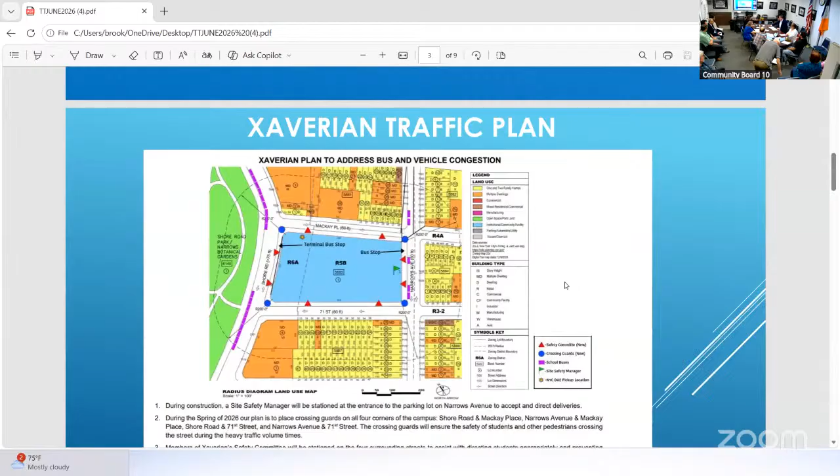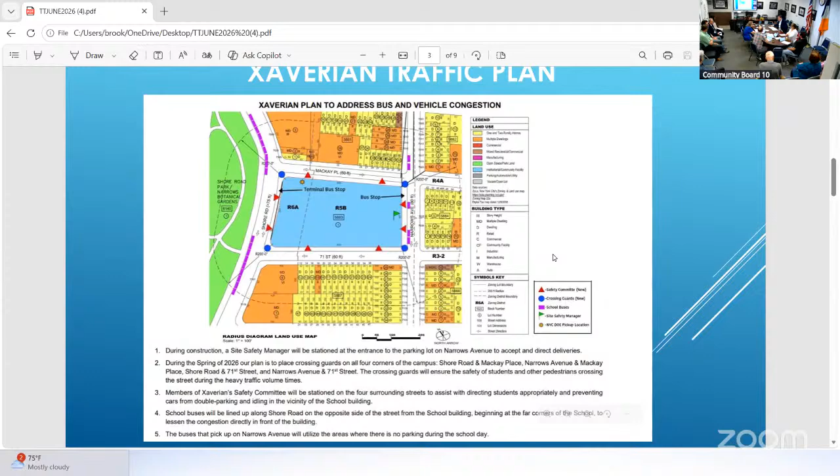The reason we're here today is to fulfill a promise we made to the community board, the traffic committee, about 6 months ago, when we sought endorsement from the zoning committee for a Board of Standards and Appeals approval for a variance to construct an expansion on an existing wing of our building. We reported to the committee in April that we were still implementing our plan. The plan we'll share with you shortly was also requested not only by the community board and the traffic committee, but also by the New York City Board of Standards and Appeals and their commissioners. We're happy we've been able to fulfill that request for everyone. Our plan is just about fully implemented, and it aligned properly with the start of our construction project, which was on May 15th.

I know the plan is being displayed now. I'll just walk through it in its general state. The objectives were to provide safety not only for students but local pedestrians and street crossings during both our arrival and dismissal times, which can be a little hectic for a school, as well as to provide the best means of operational traffic flow and mitigate double parking, honking, and noise. So what we've put together, I think it was well appreciated by the Board of Standards and Appeals and hopefully by the community board as well.

We have a plan that's self-created, and some new positions were put in place at the school where we incorporated a safety committee, some crossing guards, redirecting of school buses, and in connection with the construction project, a dedicated site safety manager at the entrance of the construction site.

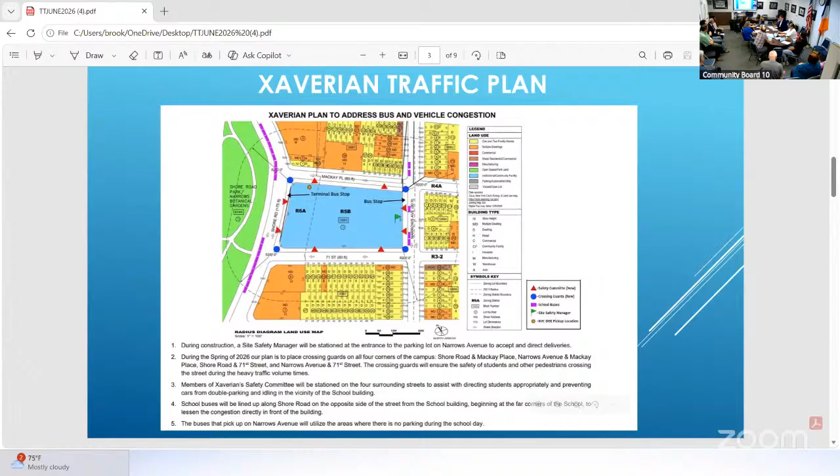So to walk through it: on each of our corners, going north and south, Mackay Place to 71st Street, and west to east, Shore Road to Narrows Avenue, on each of those four corners you'll see the index on the right indicate a blue dot, which is a crossing guard. We put those individuals there both at our arrival and dismissal times to make sure there's safe movement of pedestrian traffic across the street.

In addition, the red triangles identify a safety team created by the school. Those individuals could be anyone from a building prefect to a teacher to an administrator who dedicate time during both arrival and dismissal periods, stationed two per block, one on Mackay Place, one on Narrows Avenue, one on 71st Street, and one on Shore Road. Their goal was to help facilitate the movement of students and pedestrians if needed, and without confrontation, try to move parents along that may be double parked, or mitigate any traffic they can, just to keep the block flowing as best they possibly can.

In addition, the site safety manager makes sure there's no construction activity interference, which is at the center of the block on Narrows Avenue.

We've worked as best we possibly can to shift the pickup locations for our private busing of students directly onto Shore Road, and limited some on Narrows Avenue, again just to offer the best possible traffic flow. There are concerns that Shore Road at times becomes like a one-way street, so we've pushed pickup locations further down on the non-residential side of Shore Road, similarly on Narrows, to try to mitigate that as best we possibly can.

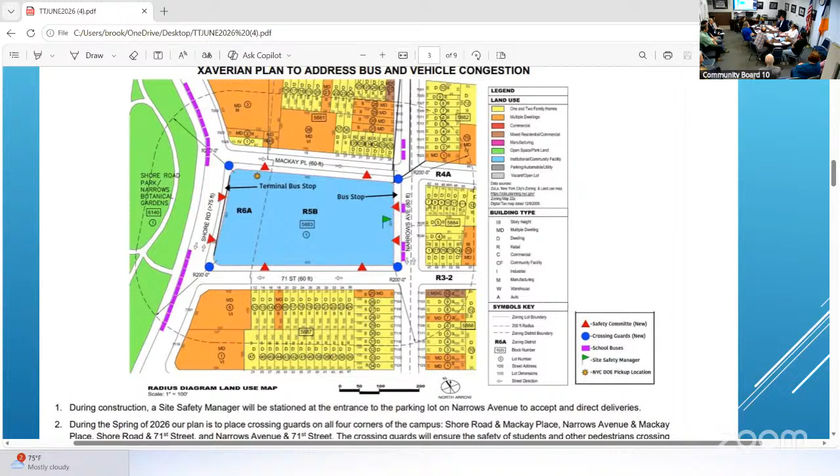In conclusion, when we put this together and had it in place for about a month, we're certainly seeing the benefits. I think it's something that will not only be part of what we do during the intense construction period, but will carry forward into the future beyond construction, to try to be as cordial as we can with the neighbors. I'm happy to answer any questions, but seeing 3 weeks of this in place, I make a point to be out there daily to see how it's flowing, and it seems to be working well. We'll continue to refine it and see what else we can do to help.

As usual, we'll ask for board members who have questions first, both board members who are in person and online, and then we would take any other questions.

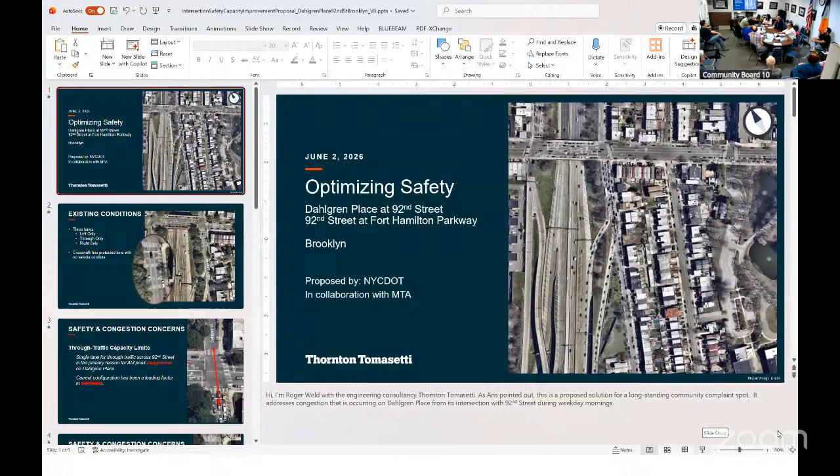I'm going to share my screen here. Is it all right if I control it? Can you see me okay? No, give up the share screen and let him share. I don't know how to share the screen in this one. Can you see me okay? Not yet, Roger, we're working on it.

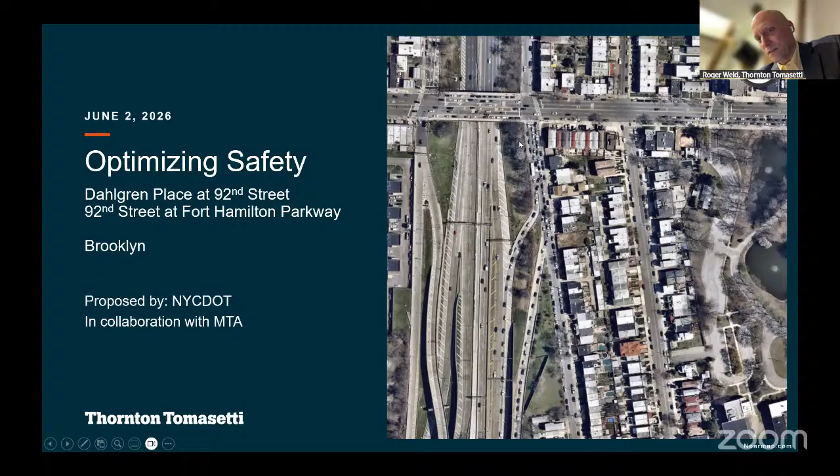So the existing conditions are you have 3 lanes associated with this intersection currently, and you have this buffered out area on the right that is basically used to enhance the turns, but isn't really necessary to do that, we found out.

You also have a crosswalk here that's protected phase, so it's made safe for everyone to be able to cross at all times. We want to retain that, that's not going to change at all, that's not going to be messed with in any way.

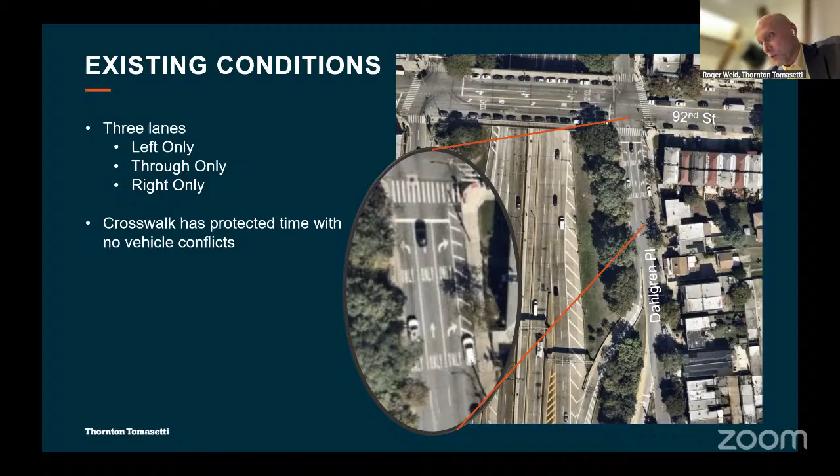What we're proposing doing here is, first of all, you have a through capacity limit. You only have 1 lane that is going through right now, and you have over 800 vehicles that want to do that during AM peak. These lanes can handle not even 500, so you're basically almost doubling the need, about double what the actual capacity is in that lane.

So you have some problems both with capacity where it's backing up, and then as a result of that, collisions that are happening on the Verrazano Narrows Bridge as well. So it's a big safety factor for the bridge.

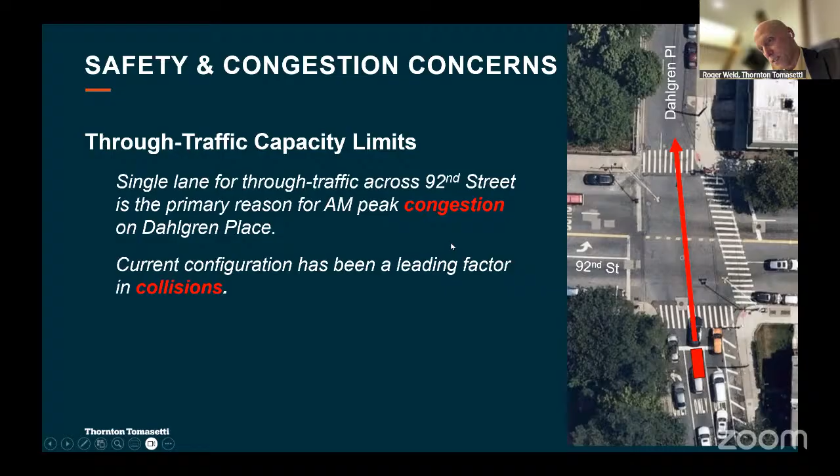And then in addition, when cars come off the lower level of the Verrazzano Narrows, there's a very short distance, only a couple hundred feet between where that exit ramp on the lower level lets out and the intersection.

What's happening right now is if anybody wants to make a right turn coming off the lower level, they have to cross over 2 lanes in order to make it into the right turn bay to make that turn. That's also an additional source of collisions and congestion because it's also bottlenecking the through movement.

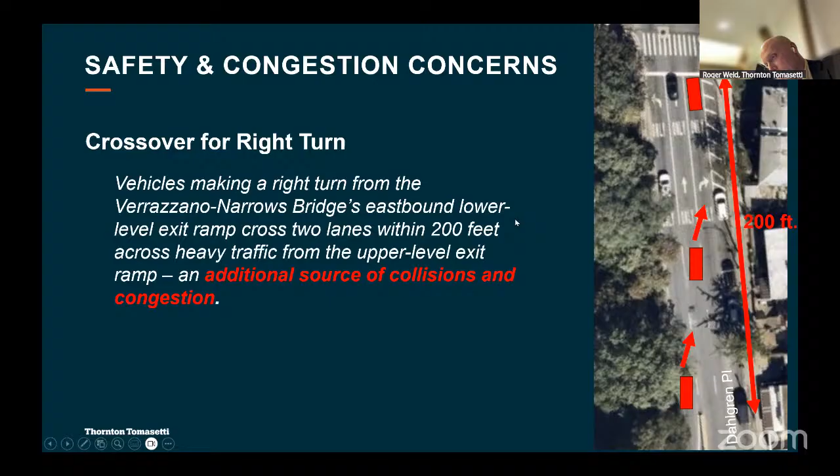What we're proposing in terms of changes: remove and replace striping on Dahlgren Place approach to 92nd Street. This would add a single lane for through and left turning traffic to reduce congestion. Right now you just have this through lane, and the proposal adds another lane that would take over the hatched-out shoulder space on the right side. You're able to fit in 4 lanes in this area, and this added lane would be both through and left.

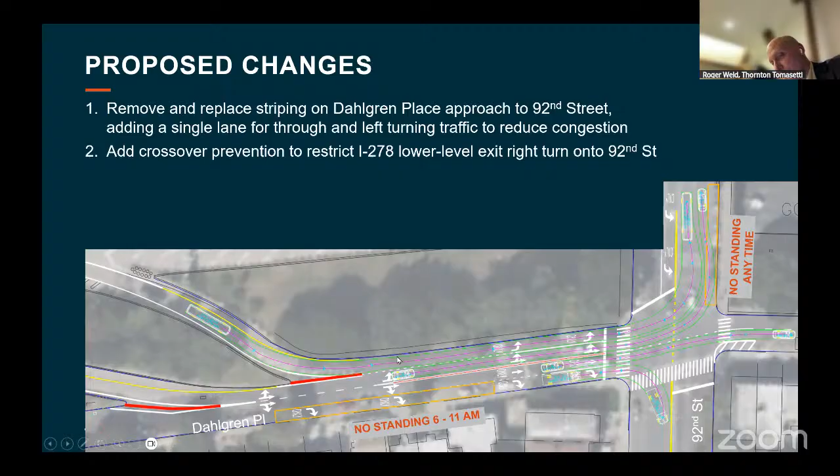We'd also be adding crossover prevention to restrict this lower level ramp from being able to make a right turn onto 92nd Street. The right turn could only be made from the upper level, so you don't have that crossover problem.

And then in order to do this, you'd have no standing signs, 6 a.m. through 11 a.m., Monday through Friday, affecting 6 vehicles, 6 parking spaces, basically around this area where the orange marking is.

Sure. The lower level will be restricted from making the right turn onto 92nd. So if you want to make the right turn, you have to be on the upper level to make it, because the upper level is quite a bit further behind the lower level in terms of where it enters in. You have an additional 100 feet and your lane shift is different from where the lower level comes in, so you don't have as far to shift. You still need to move over 2 lanes, but you don't have all that interference with the through traffic anymore, so it's a lot cleaner.

So the lower level - Roger, let me just stop you there for a second to help explain it a little more. The fact is there's only 1 lane that allows through traffic from Dahlgren to go continuous straight - we live on that, that's the middle lane, yes, we know that.

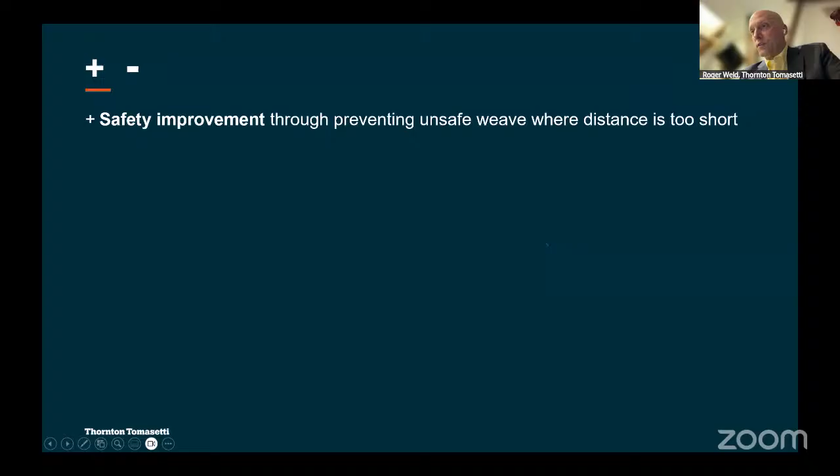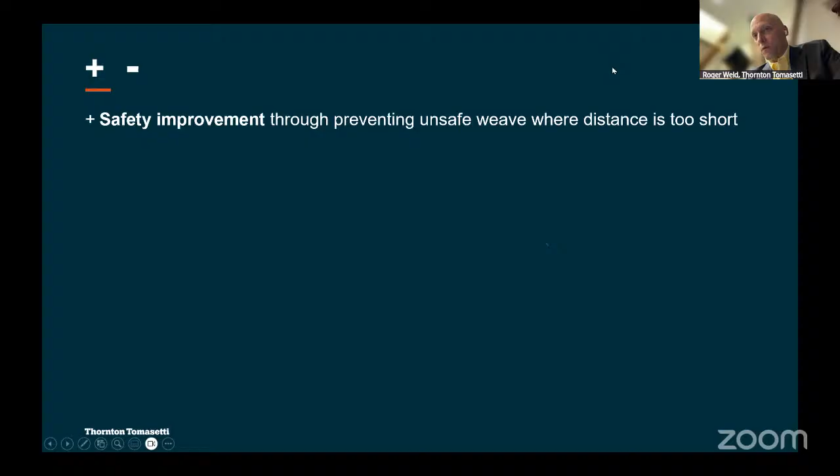So the pros and cons to this. A pro is safety improvement through preventing an unsafe weave where the distance is too short for the right turn. Basically, when you come off the lower level of the bridge, there's just not enough room to weave over that distance without creating safety problems. It also solves another safety issue by preventing backups into the Verrazzano Narrows, and you get reduced congestion on Dahlgren Place, which improves traffic flow for residents and exiting vehicles from the Verrazzano Narrows Bridge.

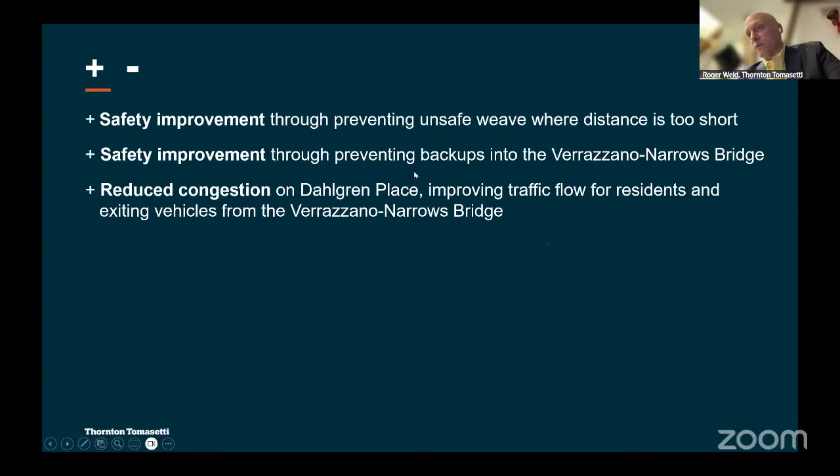Right now, if you live on that street, you're caught in the same traffic. You get stuck where you can't move during the morning peak, where it takes signal cycles to exit. As a result of this change, every single phase should clear and everybody should get out. You'll also have less air pollution from idling vehicles, because you won't have cars just sitting there.

On the negative side, the right turn to 92nd Street would be from the upper level ramp only, so you won't be able to make that turn from the lower level anymore. It's really a safety benefit, because right now it's an unsafe move that's happening, and this would prevent that unsafe move from happening.

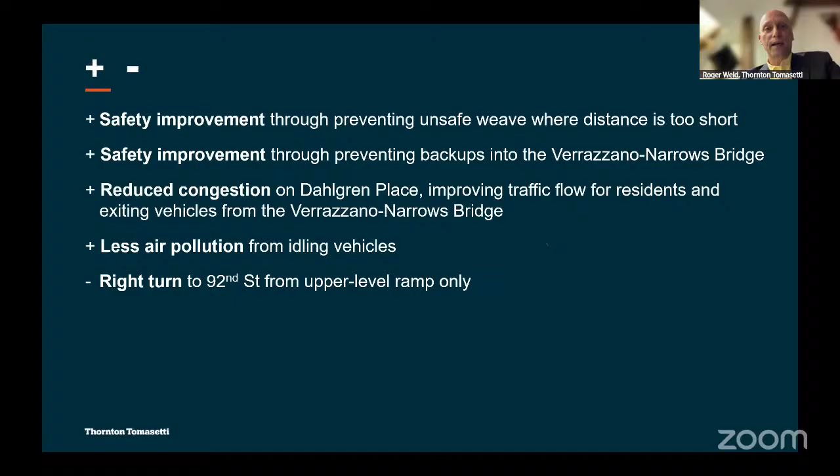You'll have the parking reduction on 92nd Street for 6 cars, and restrictions on Dahlgren Place Monday through Friday from 6 a.m. to 11 a.m. for 6 cars. There's another issue that got brought up at the Transportation Committee meeting, but I wanted to ask if there were any questions on this part of the proposal first.

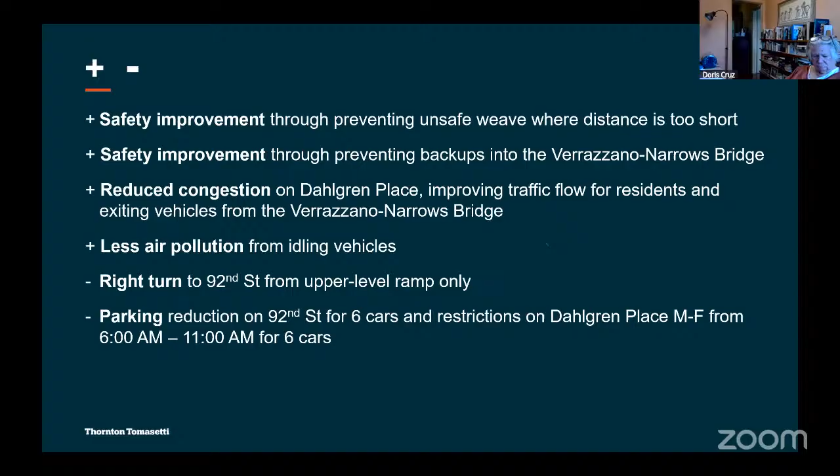We're saying to the right, why don't you do reverse? There's no parking on the left side, no homes there. Why can't that lane be the lane that can only turn left, and the middle lane and the right lane can either go straight or turn right? Where there is parking and people live there, they're going to have to get out of their car to let somebody out and back up traffic. So why can't you reverse it and have the left side left-only, and everybody else on the lower level can only turn left? The upper level, why can't you do that?

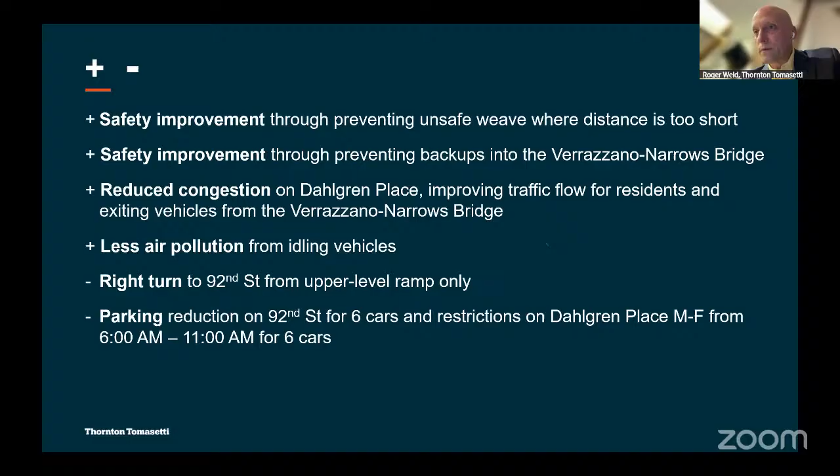That is what we're doing. No, you're doing it the other way, you're doing the right way, you're doing the only... Can you go back one, upper level? Sure, yeah, absolutely, let me go backwards here. So if I can show you on the screen, I'm going to be pointing. Okay.

This left lane that comes from the lower level is left only, it'll make a left. Is that the one that's on the right side right now? It's right here, the lower level. So cars coming off the lower level are going to be left only, that's across the street from the homes. The upper level exits much further back, and they'll be able to go either straight, right, or left. So there's going to be this quick curve here.

This will restrict vehicles from the lower level from cutting across these lanes and causing accidents, and they won't be able to make a right.

Then why would we be losing parking spots? Is the parking lane going away now? So on this, we're talking about the morning peak, so between 6 a.m. and 11 a.m., there's 6 spots that you won't be able to park, and that's from here to here. That's in order to allow traffic, because it's high volume, to make a safe right turn without blocking all the other traffic on the block.

So it'll free flow. We recognize there's a trade-off here, right? We're recognizing that 6 spots are being taken away. So there's definitely a trade-off, but it's also a safety issue. Currently we have a safety problem, we have a congestion problem, and this is a solution, and sometimes you have to make trade-off decisions.

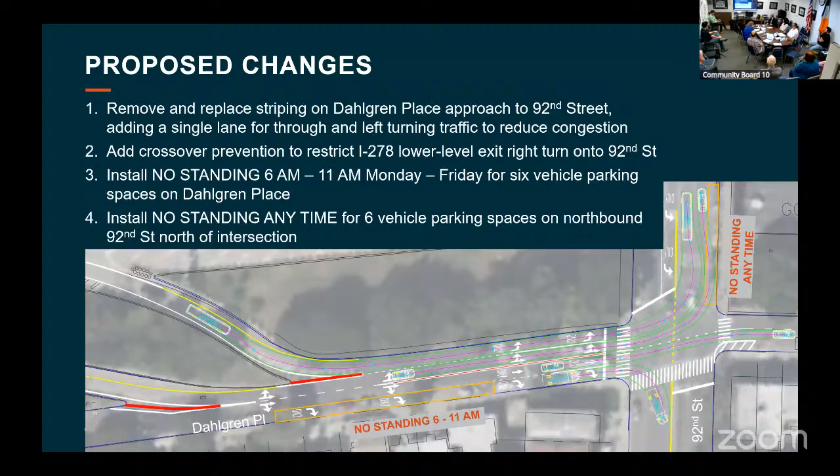Okay, and just quickly, where will the signage be for drivers so that they know which level to take? Those signs are going to be permanent signs all the way back before they even get onto the bridge, to let them know that if you're getting onto the lower level, you will not be able to make a right on 92nd Street. So we need to tell the customers before they even get to the upper or lower level, all the way on the other side, on the Staten Island side. There'll be permanent signage there. Thank you. You're welcome.

Online, a follow up. Doris? Yes. When there is heavy traffic on the Belt Parkway or on the entrance to the Belt Parkway, many people get off and turn onto 92nd Street and go to the Bay 8th Street exit to get to the Belt Parkway. So now the people on the lower level will not be able to do that. And sometimes they don't know how bad the traffic is until they're well onto the bridge.

Yeah, well, if you recall - I'm not sure if you were in the meeting back in November - when we presented the reconstruction of the Belt Parkway ramps. We are in the middle of that project now, it's underway and we just started. That's a complete reconstruction of the Belt Parkway ramps that will largely solve that problem, because I don't see it happening when I get on the Belt Parkway.

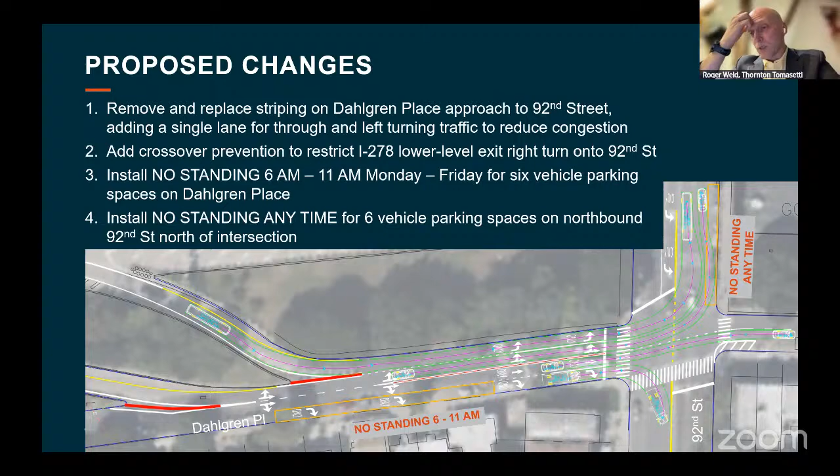There was a major safety improvement made. Greg can actually explain it more - he was involved in it. Right now, I could show you how the signal timing works. Each one of those three crosswalks is completely protected from turning vehicles. When I point to the north crosswalk, first of all...

Well, there is no north here - this north is to our right. Oh, to the right? Okay. Yeah, when that crosswalk is walk, all traffic movements are red. So if nobody jaywalks, you don't have to worry about cars turning into it.

And now if you could point to the east crosswalk, the long one on the bottom - similarly, when that crosswalk is walk, there's a green ball for the northbound, but there's a red right arrow. So that crosswalk is also completely protected. In other words, when that east crosswalk is walk, the northbound right is always a red arrow, always. And the south crosswalk doesn't have any cars turning into it. So, in short, if everybody pays attention to the pedestrian signal, which I know people don't, then you never have to worry about cars turning into you if you obey this signal.

I don't know if I'm really following it. You said that the upper bridge would not be allowed to make a left turn, right? If you're coming off the upper bridge?

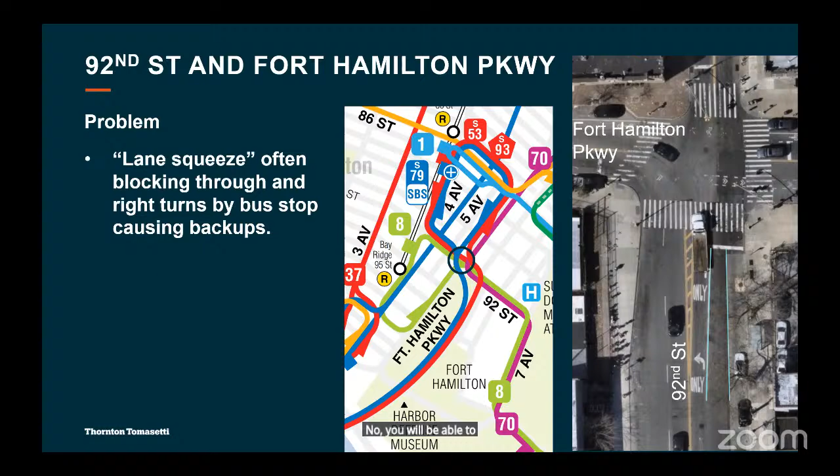No, you will be able to. Yes, you can make a left. If you're coming from the upper level, you can make either left, right, or go straight, all three. And Dahlgren is technically on the upper level exit, so we have to get over there just to get out to the bus. Yeah, you'll be able to make a left.

So what's the lower level then? The lower level's left, left or straight from the lower level.

But that straight run that you said, most people want to go straight, that's not really the case. Well, that's not me saying that, I'm just saying, hold on, I'll answer your question. That's not me saying that. The traffic numbers are saying that because traffic counts were taken. So Greg, can you answer, Roger, can you answer that question?

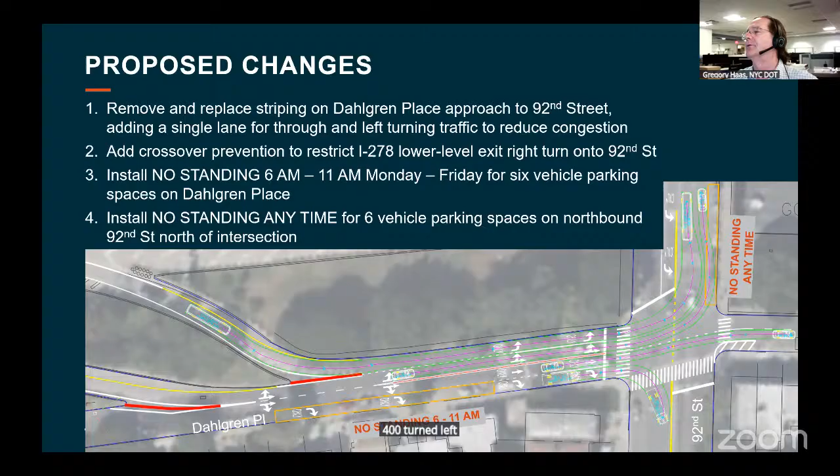Say again? No, I said, because they want to get on. I don't see it, but okay. He said there's 400 vehicles making a left, 400 vehicles making a right, and 900 vehicles going straight. Correct, because they want to get onto the highway. They're either going to get off at 86th Street when they get off the bridge, or they get going further down in Brooklyn.

When we got here tonight, before the meeting started, we told a little anecdote. Before we left the house, if you look at that picture there, you see the H of Dahlgren Place, that's where my house is. I'm about 10 feet below the stop sign for the upper ramp. We just decided to count cars tonight, no rush hour, everyone driving nice and calm. We counted in the course of about 15 minutes, 81 cars. 4 cars made a complete stop, 19 cars made a slowdown, the remaining cars blasted through at 30 or 40 miles an hour.

What we're saying here tonight is great, but if there's no enforcement, it's meaningless. True. Up there, you have the no standing sign, is there any enforcement? 11 a.m.

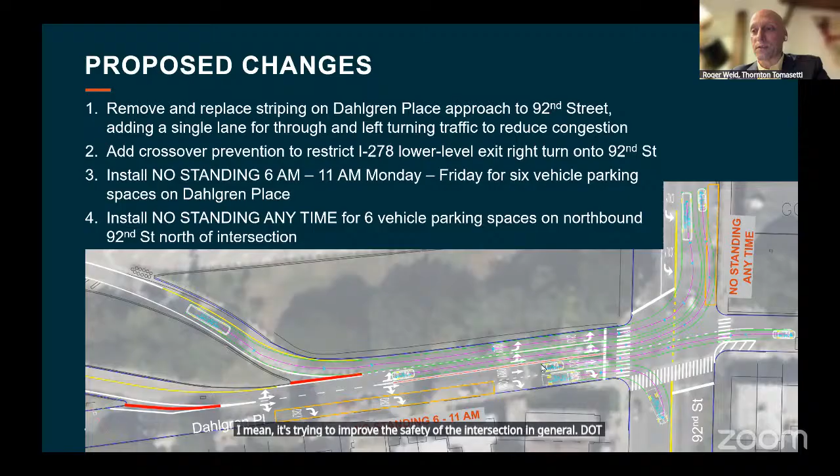The improvements made to the signal timing were in response to that incident. The intersection is now designed for exclusive crossings, so you don't have interference from vehicle turns as a result. It's trying to improve the safety of the intersection in general. The DOT made a big effort to maximize safety here for those crosswalks.

Thank you. Eileen Sacco? Hi everyone, I have a bunch of different things.

I live behind both ramps and work in Staten Island, so I come off the lower ramp pretty much every day and have to go around the block and turn right. I don't like the upper roadway in inclement weather or when it's windy, so my first thought was I'll just go to 86th Street instead, if I can't make the right turn there. I'm not the only one who's going to think that, and I think you're going to be pushing some traffic to 86th Street.

Number two, the lane that you're now making no parking — you do know that tow trucks use that all the time to drop off accident cars that were messed up. They're there almost every day. So I'm not sure that making it no parking is going to do anything, because we still always have cars there that get into accidents.

And the other thing is this: all of these turning and no-turning rules are all relatively new. I've been here for over 20 years, and I'm sure some of my neighbors double that. Why wasn't all this done the first time, if this is so dangerous?

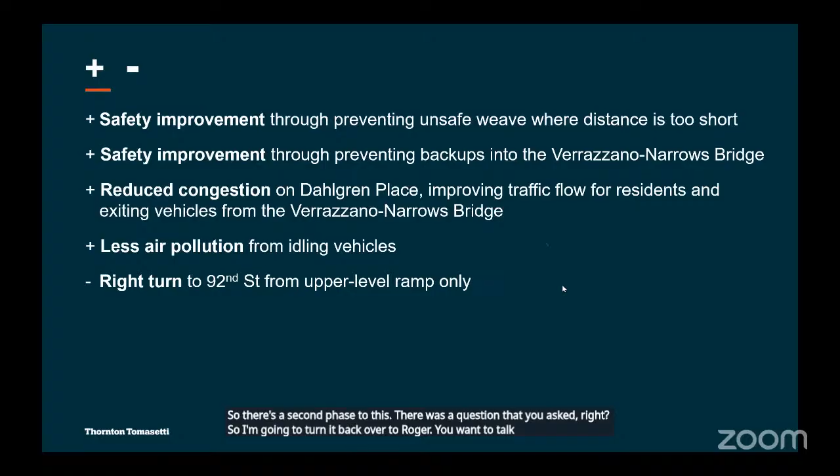Right, on 92nd. Yes, so there's a second phase to this. There was a question that you asked, right? So I'm going to turn it back over to Roger. You want to talk about the downstream improvements that DOT is considering?

Sure. Right now there's a problem that was identified. Actually, we talked about this at the last transportation meeting about a month and a half ago, where it got brought up as an issue, where there's a lane squeeze here, where this hatched out area is basically pushing over the left turn bay, and then the lane here adjacent to the bus stop becomes about, I think it's about 8.5 feet wide at that throat where it gets really narrow.

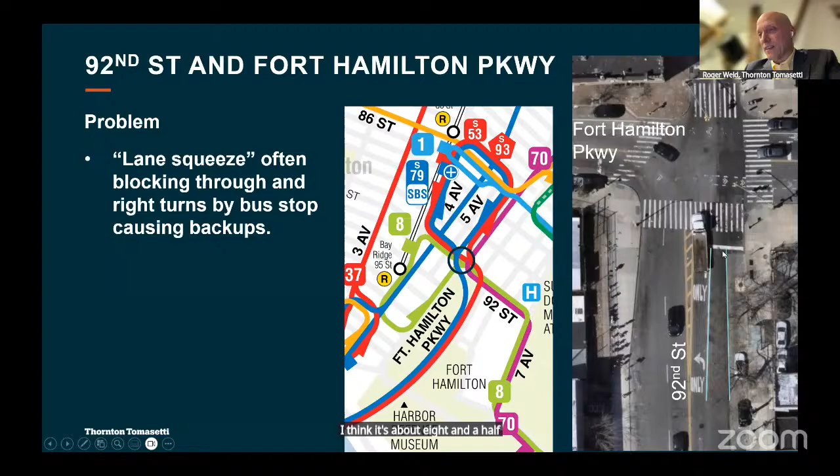And so what we're proposing as a first step is fixing this intersection. So it will go from, I guess it's 9.25 feet at that actual juncture, and it's going to be brought up to 13.25 feet. So the idea would be to straighten this out, get rid of that hatching that's in the center, and kind of normalize this intersection so that the width stays the same throughout this whole area, and then restripe through the intersection here to clean up the markings a little bit.

So now having more room will allow the buses to stop at that bus stop and allow through traffic to go around the bus and go straight without getting caught in congestion?

Yeah, it's one of the points of backup that was discussed earlier in the meeting for 92nd Street, where it's a constraint point. 92nd gets really narrow here, going from a 4-lane section to 2 lanes once you pass Fort Hamilton Parkway.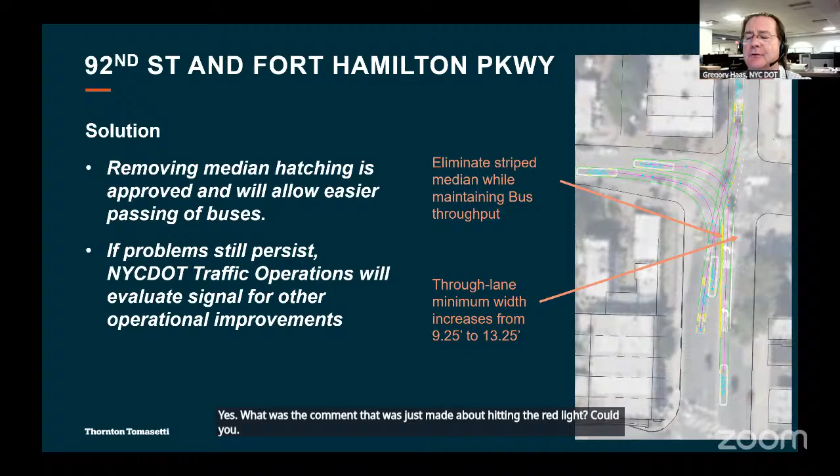Yes. What was the comment that was just made about hitting the red light? Whoever said that, could you repeat that? You come off, go over 92nd Street, make the left, then you go up past Fort Hamilton. Then you got the school, then 4th Avenue, 5th Avenue, all the way to 3rd.

All those lights are against you. So when you get past one light, it blocks you. The next light blocks you again. So if they could have them in sequence, the traffic would move right through.

So it's the synchronization of lights as traffic is moving from Dahlgren Place across Fort Hamilton and continues on to 5th Avenue, 4th Avenue, to 3rd Avenue. The synchronization of that traffic light system needs to be looked at. Okay, we'll look at it.

Let me just say this. First of all, 92nd Street is a two-way street. It's difficult to provide good progression for both. Fort Hamilton is a turn.

It's working now, isn't there a turn lane? It's difficult to provide good progression for both directions, and we also have to worry about the avenues, the progression on Fifth Avenue and Fourth Avenue. So we'll take a look at it, but it's difficult on two-way streets to provide good progression for every single movement.

Understood, but we'll take a look at it. Third Avenue, you go down, you just hit the green, that's a two-way street, so I don't know what he's talking about. You go down Fourth Avenue at 25 miles an hour, as long as you stay at 25 miles an hour, you can very much hit every single light going down.

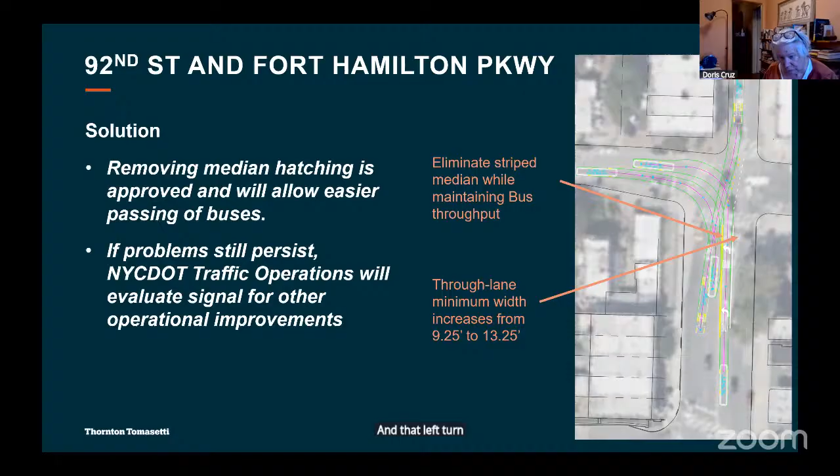Several years ago, there was a left turn signal added at 92nd Street and Fort Hamilton Parkway, and that left turn signal is a lifesaver. It's very important to the residents who live above 92nd Street. It saves lives.

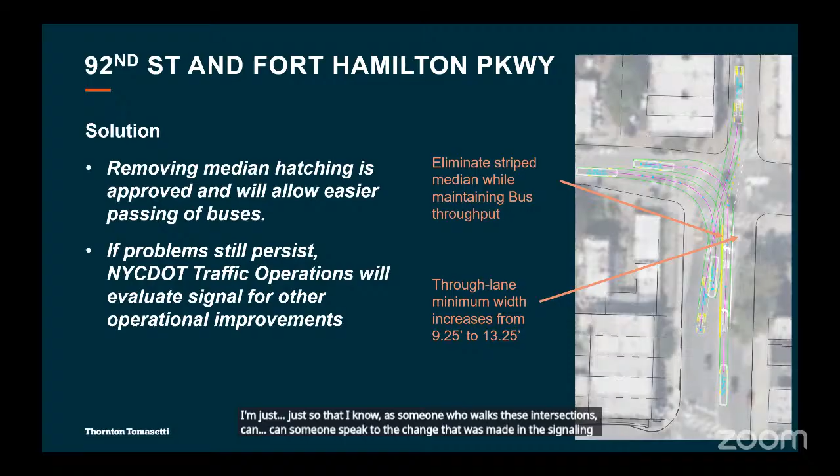Jessica: Hi, just going back to what someone brought up about pedestrian education. As someone who walks these intersections, can someone speak to the change that was made in the signaling, the split signaling, for what I deem the most dangerous intersection?

On the north side? Yeah, right there. Can we know, just so that we know when we're walking, what it was previously and what it is today? Because I think that's where the pedestrian was killed.

Yes, this intersection. Previously, when 92nd Street had green, that north crosswalk across Dahlgren got the walk signal at the same time, so cars with the green light, whether turning eastbound left or westbound right, could turn into that crosswalk at the same time pedestrians had the walk signal. Now, that north crosswalk gets a walk signal before it's green for 92nd Street, and when the steady hand goes up on the north crosswalk, then it's green for 92nd Street.

Okay, thank you. What's the timing of it so that we know how much more time we have? Because as someone else pointed out, when you start walking you may have the green, and by the time you're halfway through, you already have a red. So what's the difference in timing so we can understand the north crosswalk?

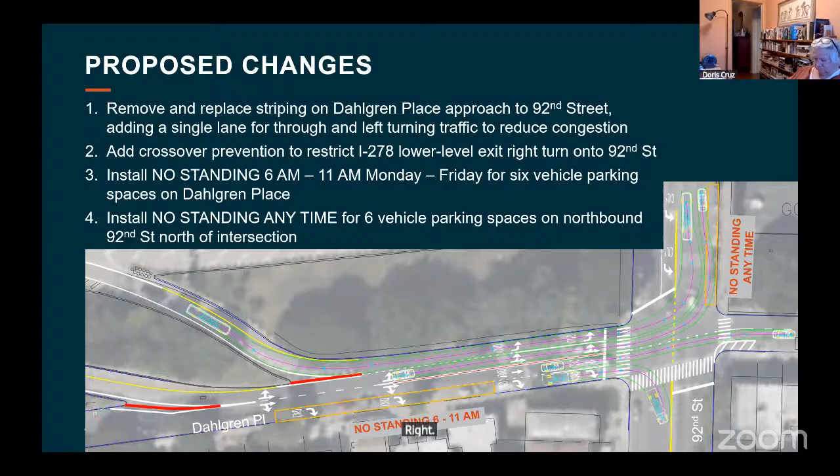What we're doing is we've contracted with an entity to do mobile camera enforcement. Legislation was passed recently that allows us to do that. So we'll have mobile enforcement units parked safely in the closed lane when our contractors are taking a lane to do their work, with signs in advance advising drivers passing the construction zone that there are speed cameras, letting them know there's enforcement. We think this will create a behavioral change with folks currently speeding over our structures, especially when they see construction and don't slow down, because we've seen it.

So yeah, we are taking initiatives on our facilities, on our bridges, to do speed enforcement to change behavior for drivers to get them to slow down, because it is a risk to our own maintainers and construction workforce that's on the bridge working.

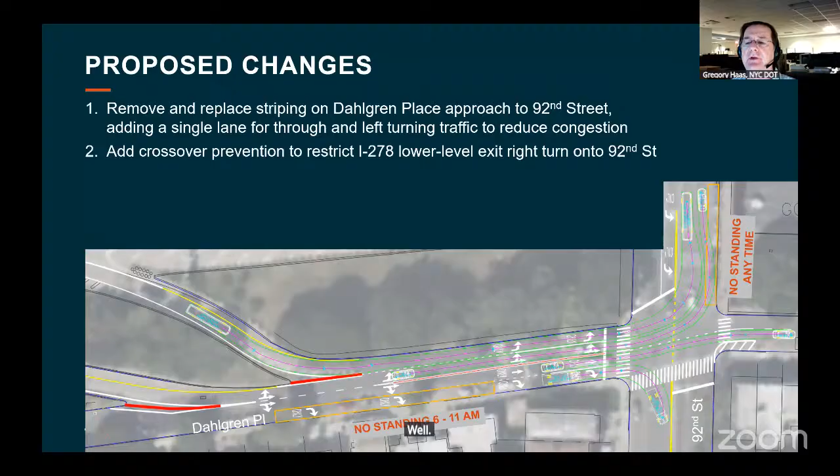There is a Barnes dance for 18 seconds. That's not very long though. There are a lot of older adults, people with disabilities. They need more than 18 seconds to cross. Well, during that 18 seconds, that's the only time for this crosswalk.

And this crosswalk gets a total of 27 seconds. So it gets 18 during the Barnes dance, and also 9 seconds before the Barnes dance. So the longest one gets about 27 seconds. Yeah, that's not very long.

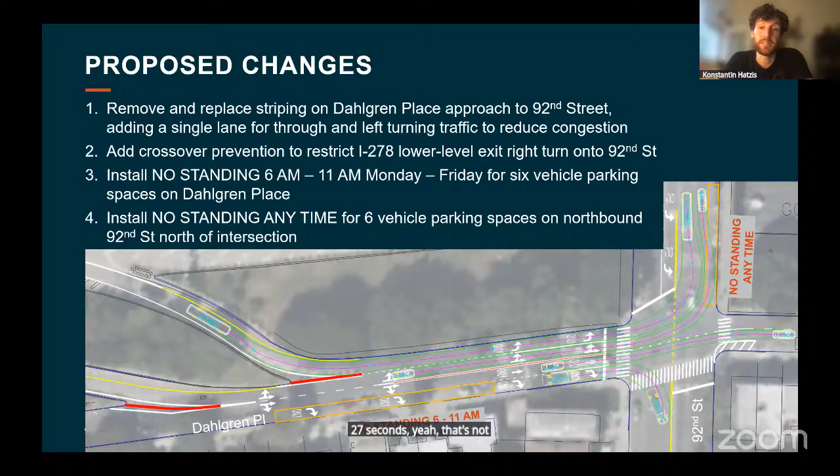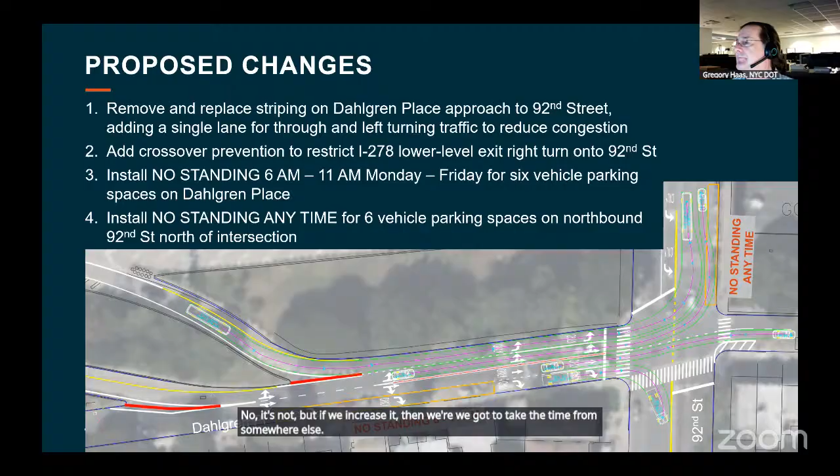No, it's not, but if we increase it, then we've got to take the time from somewhere else. If it's going to save a life versus a street, I think it would be wise to take it from somewhere else, because this is an elderly neighborhood where they're all walking around with walkers.

I do think that some of the recommendations made by the residents here are things that we should ask about. First of all, during implementation, we must ask the NYPD to provide several weeks of traffic control coverage here. We can revisit the school crossing guard request with the DOT. We can also revisit the Barnes dance timing, which was raised by several residents here, to see if there is a possibility to tweak it. These are comments and feedback I think we could include in the letter.

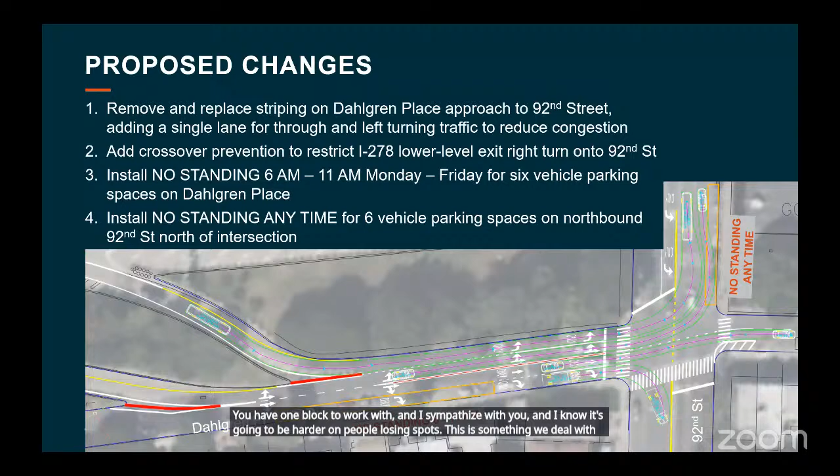I said when you came in, I really appreciate the fact that you have this calm, cool demeanor. Oh, thank you. And you just make things so easy that when friends who live in that area, I can re-explain it to them with ease and a sense of security also. You had one block to work with, and I sympathize with you. I know it's gonna be hard on people losing spots. This is something we deal with all throughout Bay Ridge. But when you have somebody who's doing his job, but also has his heart in what he's doing, you can tell. Very important.

And by the way, I just want to stress, when we looked at this and when Roger and DOT looked at this, that was a major talking point because we recognize this is important. This is 6 parking spots that are being taken away, so that's why we limited the downtime when these parking spots are not going to be available. It's during peak hour in the morning. So on weekends they're available. After 11 a.m. they're available. So it's during that time frame where we have that morning rush, that commute, that those 6 parking spots are not available. But they will be available all the rest of the time of the day and night, and on the weekends as well. Now we recognize that's not nothing, and that's important to you, so we take this very seriously when we make these recommendations.

When you see people parking in areas where they shouldn't be - I have a family that parks every single day at the pump. I used to call 311. What you just said remotivated me to start doing it because we've had the police here. They're understaffed and they really try hard, they can't be everywhere, they know all these problems already. But 311 helps.

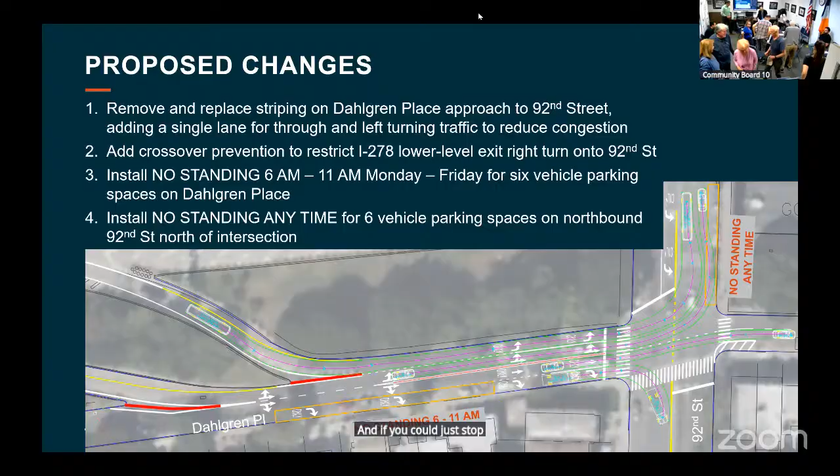It takes time, it takes time. Because I know 7th Avenue - you see 7th Avenue, they're ruining the area. Because they did this for bikes - big street like this, for bike you want. When they do the bike lane, they go through in there and they're ruining it.

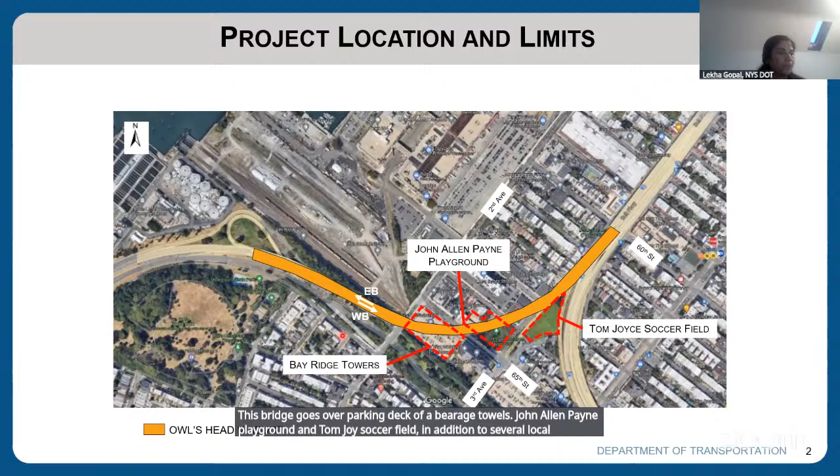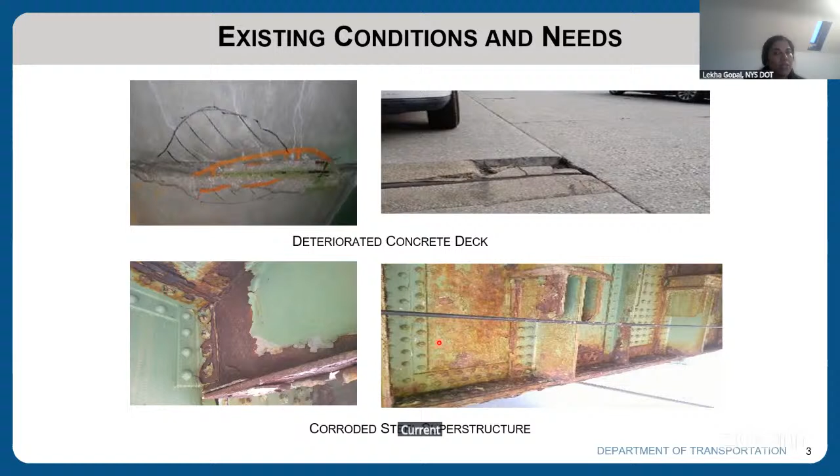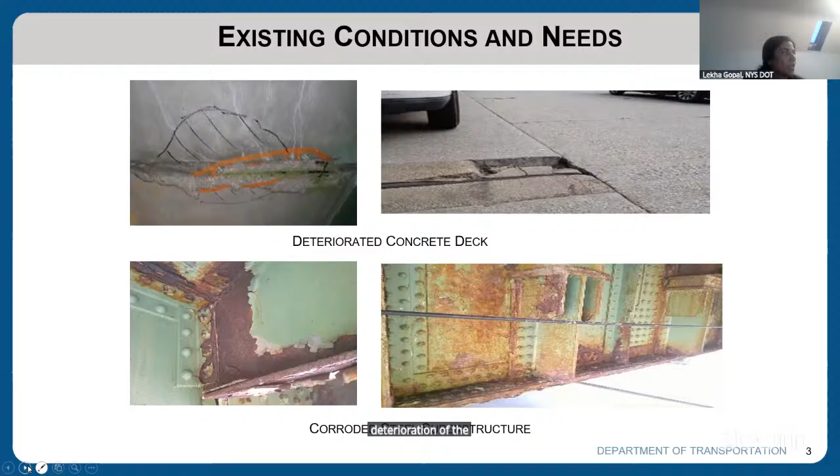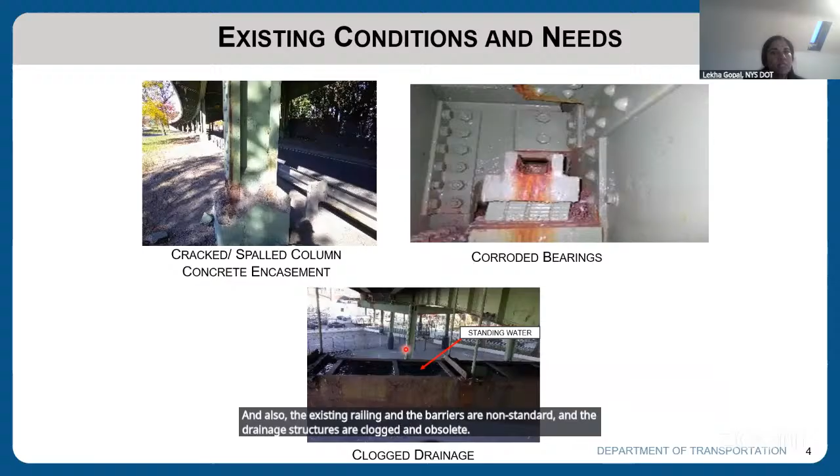Let's look into the existing condition of the bridge. This bridge was originally built in 1940, and major rehabilitation took place in 1963 and 1983 - meaning the last major rehab took place around 40 years ago. As you've seen in the screen, the bridge deck is deteriorated, joints are leaking, and there's deteriorated or corroded steel superstructure and steel members, which reduces the load carrying capacity of the structure. Currently, this structure is load posted for 15 tons due to the structural deterioration of the structural members. Also, the existing railing and barriers are non-standard and the drainage structures are clogged and obsolete. All this causes the structural deficiency of the structure, which ultimately is a safety concern to the traveling public.

So the objective of this project is to ensure the safety and reliability of the viaduct to the traveling public by repairing the existing deteriorated steel members and replacing the concrete deck. We also anticipate improving bridge safety by upgrading features like bridge parapets and median barriers to meet current safety standards, as well as improving drainage within the structure and making driving conditions safer. We are also anticipating installing glare screens to ensure the safety of nighttime drivers. Another objective is to increase the load carrying capacity of the structure, so we can remove the existing load posting, extend the life of the structure, and reduce the life cycle cost and maintenance repair.

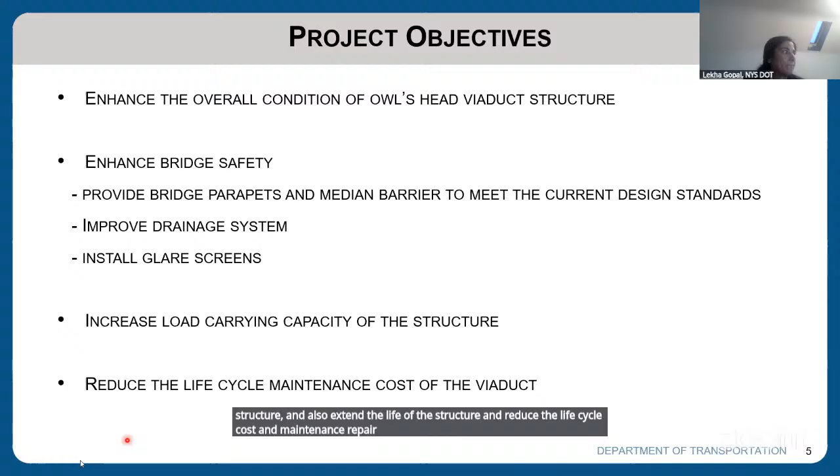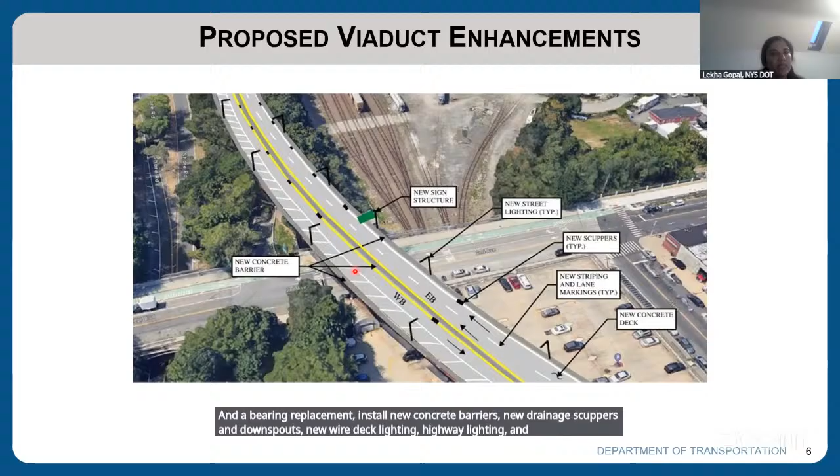By considering all these objectives, we are proposing the following improvements: deck replacement, joint replacement, repair of the deteriorated substructure and steel structure elements, and bearing replacement, install new concrete barriers, new drainage scuppers and downspouts, new viaduct lighting, highway lighting, and new underdeck lighting, new sign structures, ITS camera, some ITS work, and steel painting of the viaduct. These are the main proposed enhancements.

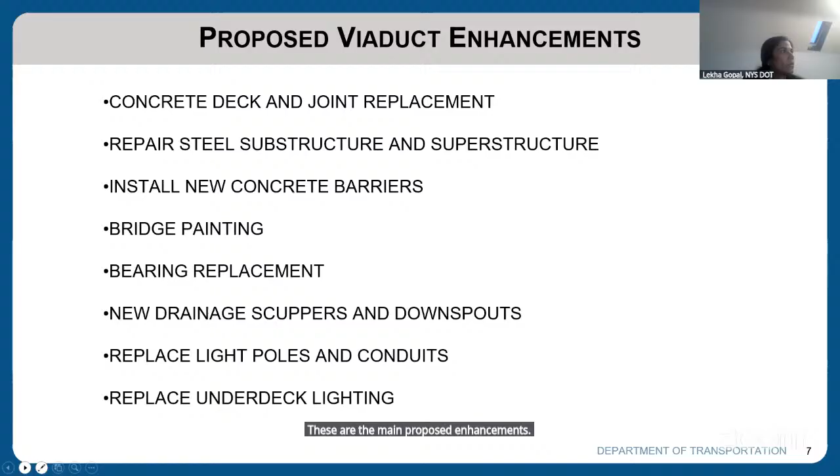Also, as part of this project, we are proposing some enhancement to the John Allen Payne Playground. New York State Department of Transportation, along with the City Department of Parks, discussed this proposed enhancement in detail with the Community Board of Parks and Environment Committee back in March 9th of this year. We also met with the New York City Public Design Commission, PDC, on April 20th of this year, and they received their preliminary design approval for this enhancement.

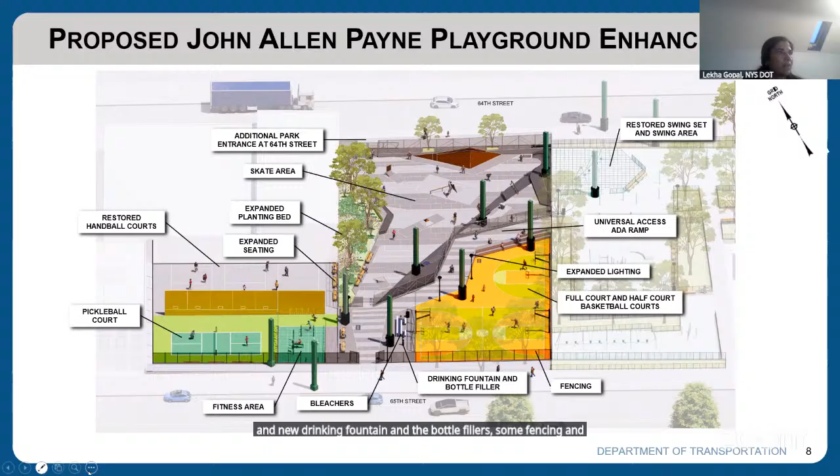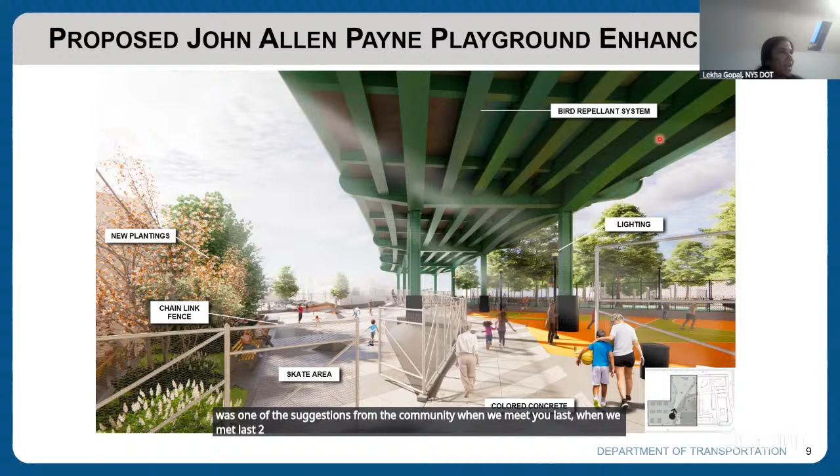So basically, we are proposing to construct a new skate area, expand the planting bed, restore the existing handball court, and an additional park entrance at 64th Street, a new pickleball court, and a new fitness area, and a new drinking fountain and bottle fillers, some fencing, and access ramp with ADA ramps. We are also proposing a bird repellent system underneath the viaduct. This was one of the suggestions from the community when we met two years ago. And new lighting in the playground.

I included only a few slides here from the previous meetings we had with the PDC and the Community Board of Parks and Environment Committee.

The viaduct construction is going to be a staged construction, and we are anticipating to maintain one lane westbound and one eastbound lane on the viaduct open to traffic throughout the construction. Entrance and exit ramps will be detoured overnight or weekends only. Detours will not be concurrent.

A portable variable message sign, PVMS, will be deployed at critical locations to alert drivers of detours. Traffic enforcement agents and pedestrian managers will be provided at each intersection along the detour route. X27 and X37 bus routes may be rerouted in coordination with the MTA during construction.

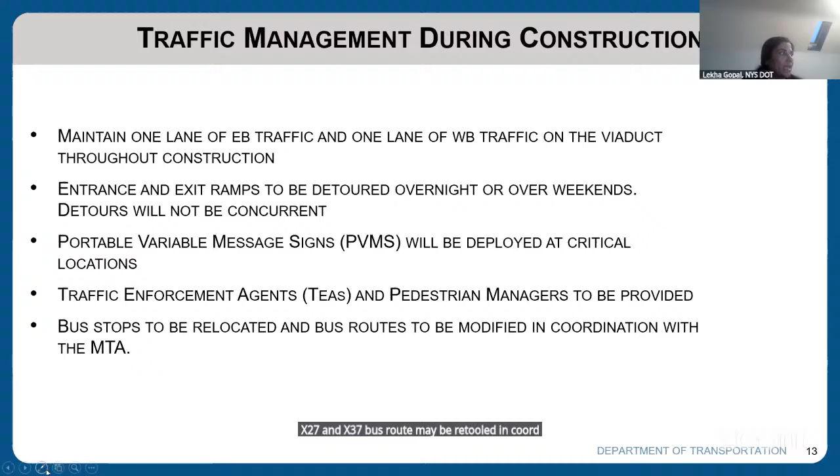We want to give some detail on the 3rd Avenue ramp entrance closure during construction. We are anticipating the ramp closed on weekends, meaning Friday 11 p.m. to Monday 5 a.m., with a maximum of 20 weekend closures. During that time, passenger car vehicles and buses will temporarily be detoured to Bay Ridge Avenue and Bay Ridge Parkway. Approximately 1% of truck traffic uses this ramp to get onto the Gowanus Expressway. During the ramp closure, trucks will stay on 3rd Avenue to Hamilton Avenue and enter the Gowanus Expressway near the Carey Tunnel. That is our proposed detour for the ramp closure.

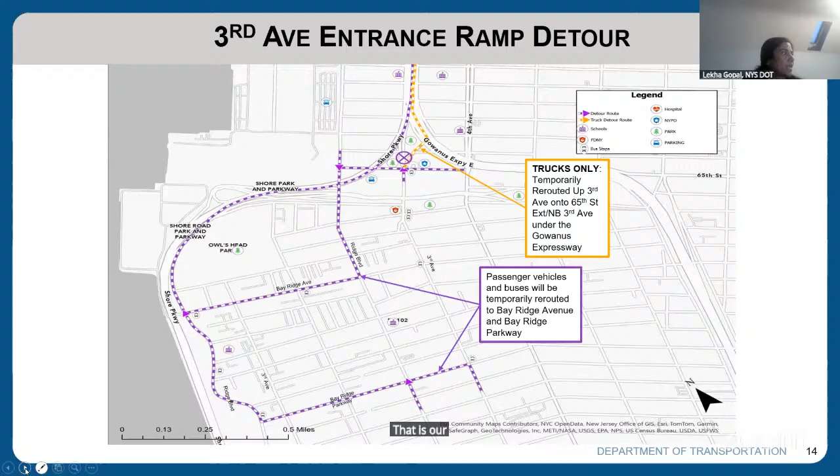We are anticipating maintaining 2 lanes of traffic, 1 lane in each direction, on local streets underneath the viaduct—2nd Avenue, 3rd Avenue, and 60th Street through 65th Street—throughout the construction. Sidewalks and bike lanes, that is the Brooklyn Waterfront Greenway, will be maintained during construction. Citi Bike stations at 64th Street and 3rd Avenue will be temporarily relocated during construction. We are coordinating with the New York City Bike Group, and the contractor will notify them 6 weeks before construction in the vicinity starts.

The temporary lane closures during construction are coordinated with New York City DOT, OCMC, and Emergency Services, FDNY, and NYPD.

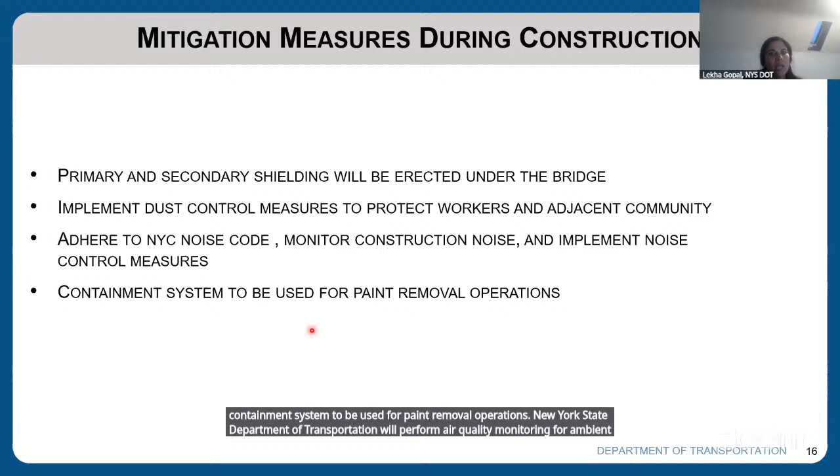Other mitigation measures during construction: primary and secondary shielding will be erected under the bridge for the entire width of the structure, to protect pedestrians from dropping materials. We will implement dust control measures to protect workers and the adjacent community. We also monitor construction noise per the New York City noise code and implement noise control measures. A containment system will be used for paint removal operations. New York State Department of Transportation will perform air quality monitoring for ambient particulate and lead during abrasive blasting and cleanup.

As mentioned, during construction of the John Allen Payne playground, the playground is anticipated to be partially or intermittently closed. We are in close coordination with the New York City Department of Parks, and the comfort station and entrance will remain accessible throughout construction. Other areas will be intermittently closed during construction.

The project schedule: letting is anticipated this fall, with construction starting in the beginning of 2027, and viaduct completion in fall 2030.

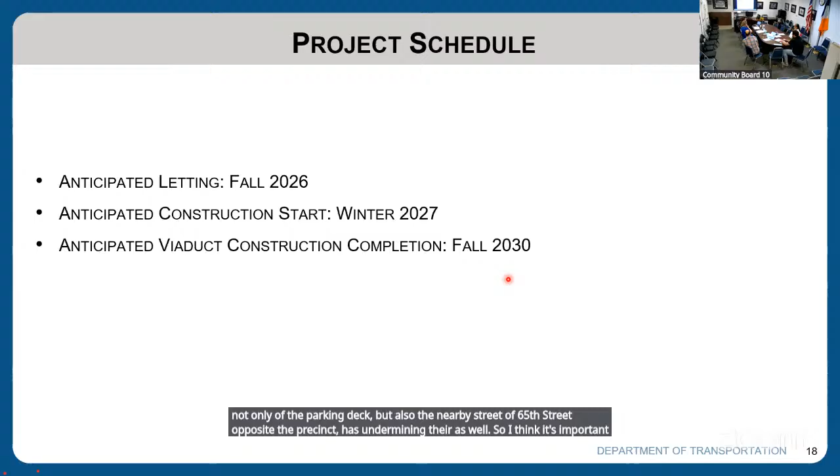Maybe we should connect you with the contractors and the team at Bay Ridge Air Rights, because they currently have contractors dealing with the undermining of their parking structure. There's a full vacate order, and they've installed temporary shoring, not only of the parking deck but also the nearby street on 65th Street opposite the precinct, which has undermining there as well. So I think it's important that we coordinate with the contractors, DEP, DOT, and the Bay Ridge Air Rights contractors as you prepare to move forward with this project, since it falls above the Bay Ridge Towers parking area.

Yeah, definitely, we are in coordination with the tower about that. Right from the beginning we were in touch, and we have special notes in our contract. We have to monitor that parking deck in the vicinity when the contractor is working near this viaduct at the vicinity of this parking deck. We are aware of the supporting shoring provided and everything. But whatever happens, we are anticipating very limited or no access. That is what we are anticipating right now. Our contractors or heavy equipment, nothing—state DOT contractors are not getting into the parking area, or they have limited access, and we are monitoring the condition of the deck while any work is happening in its vicinity. That is the status. We are in coordination.

Thanks for letting us know. All right, thank you, Lekha.

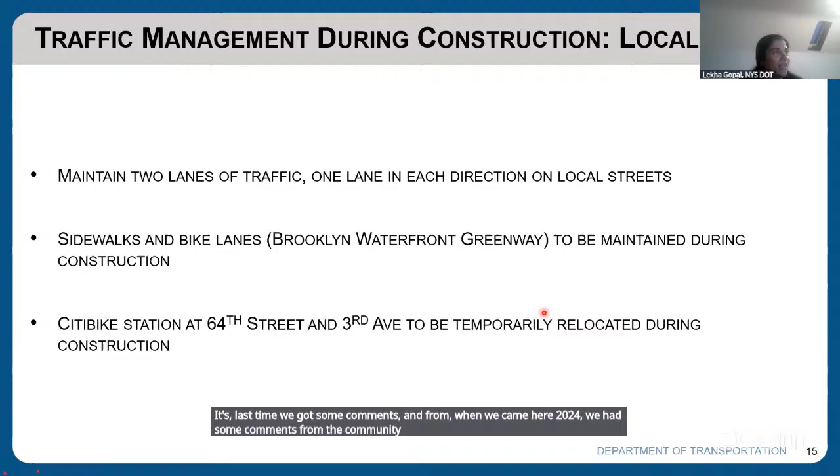Last time we got some comments, back when we came here in 2024, from the community saying that underneath the bridges there's bird poop and all kinds of issues—it's a safety concern for the public and for kids playing around. That's why we took note of that, and we are proposing this bird repellent system as we construct underneath the bridge, which may protect from bird poop and those health and safety issues.

Maintenance of the structure is by the state. Whatever we put on our structure is maintained by the state DOT. That's your question, right? Yes, okay, thank you.

May I add—is it bird netting or something more substantial, like a mesh or metal steel mesh? It'll be like bird spikes or bird coils. They'll sit on top of the steel flanges so that birds can't sit and perch on top of the structure above.

Okay, alright, thank you. Yep, no problem. I don't see any other questions. Alright then, thank you very much.

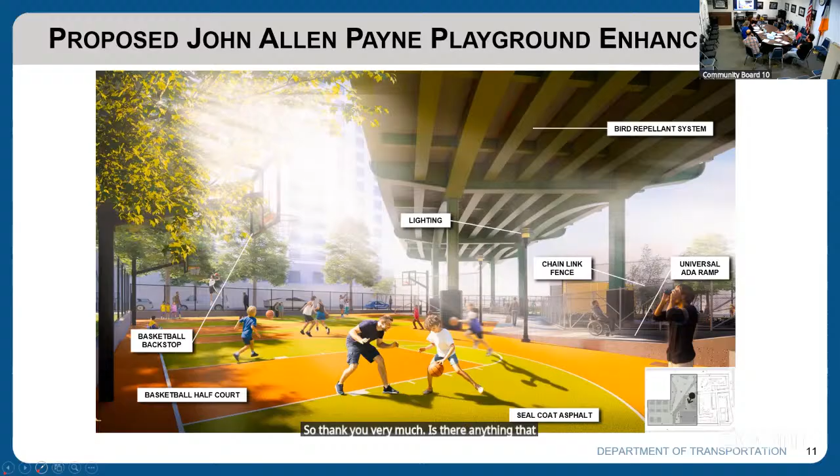Is there anything the state DOT requires of the board, or is this just an update? This is an update actually. Back in 2024 you guys suggested coming back when ready—yes, that's why we're here.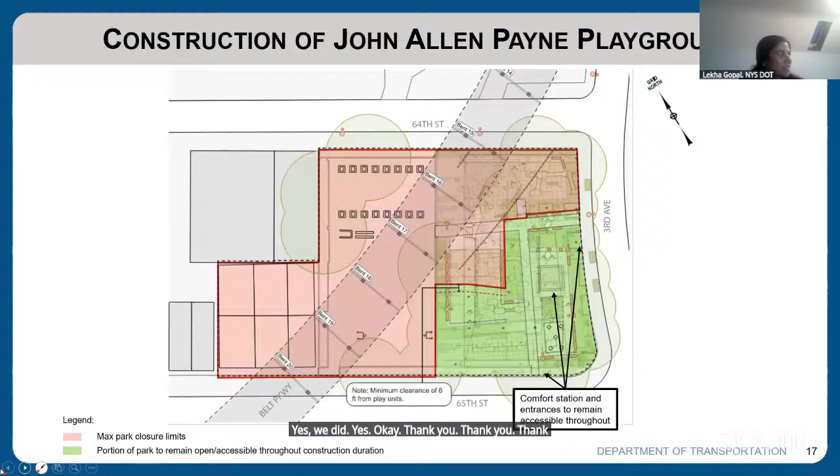If you could continue to keep in touch with schedules so we can inform the public as we progress into the anticipated construction start, as well as any updates regarding Staley's question, we'd appreciate the ongoing communication. I will share with you the Bay Ridge Towers construction information as well.

This is the latest information: anticipated construction start is beginning of next year, with letting this fall. This is the anticipated updated latest schedule—if there's any change we will definitely let you know.

Will there be a community liaison assigned to this project once it begins, like most state DOT projects? We will let you know—I don't have a name right now. Perfect, alright, thank you so much.

Hi, this is Rolando Infante. Just to let you know, I will be attending the district cabinet meetings as always, so if there are any updates on our end I will let you know during agenda items. And if there's anything on your end regarding the towers or suggestions on the playgrounds, you have my email, you can call me, or we can bring it up at the next DSC.

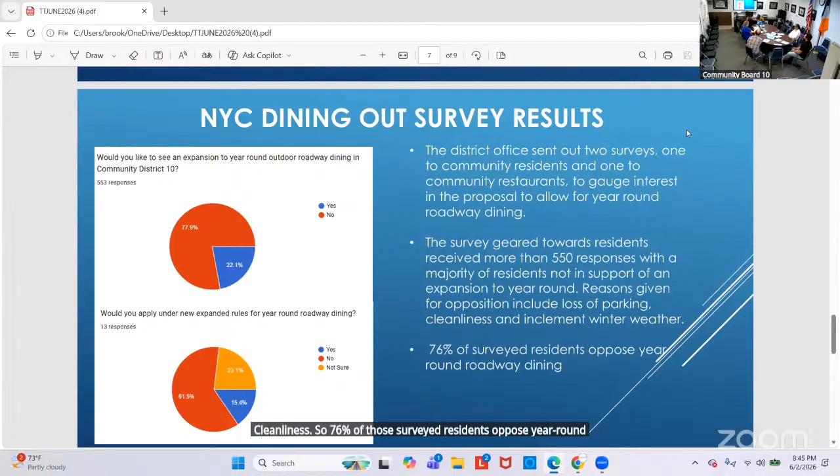The expansion to year-round dining didn't get positive feedback because of the climate, loss of parking, and cleanliness concerns. So 76% of those surveyed residents oppose year-round roadway dining. If we contrast that to the restaurants, we only heard back from 13, although we sent out to well over 200. So I just want to give you a quick update on where we're at.

We got a lot of phone calls from restaurants, most of whom are not participating in the outdoor dining program, or did so under the temporary order because of the need at the time. Most feel they have enough indoor capacity, and it's very difficult to expand wait staff, etc., for outside. 60% of restaurants responded that they would not participate in roadway dining, most citing the weather as the reason to refrain, saying it really wasn't utilized.

Nearly 70% participate in the temporary roadway program, and only 30% are participating in the sidewalk program, with only one respondent doing both roadway and sidewalk dining. The top reasons they mentioned regarding roadway and year-round sidewalk dining is that the city's current program does not permit heating or enclosures during inclement weather, and they thought that would be a really good idea.

I spoke to about five restaurant owners who actually called and picked up the phone and said that they love the sidewalk dining year-round, and would appreciate it if the board would send in feedback and comments that we'd like to see enclosures or heating or something to keep them going, because those that do participate really enjoy that.

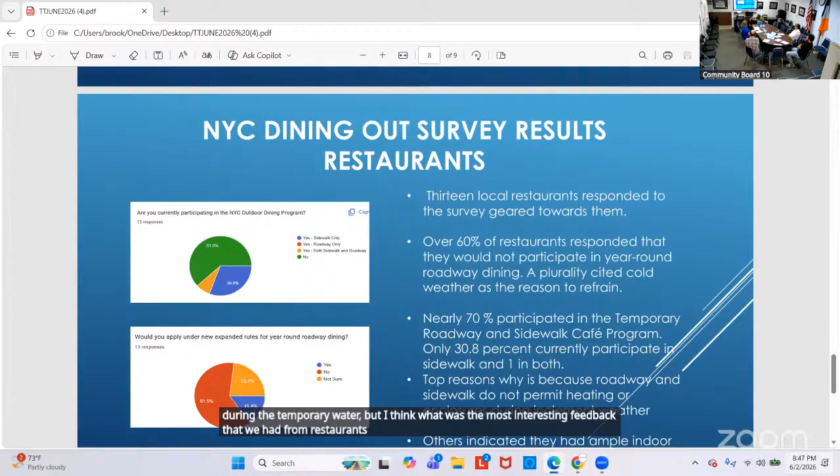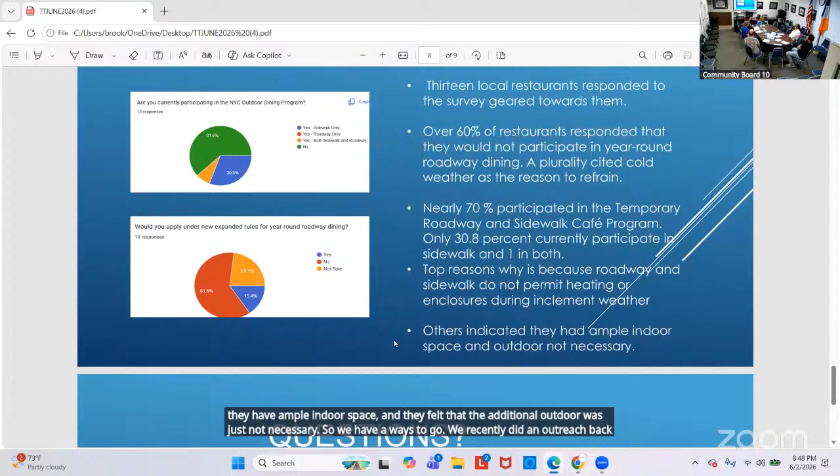Again, most who indicated they didn't want it is because they have ample indoor space and felt the additional outdoor space was just not necessary. So we have a ways to go. We recently did outreach back to the restaurants who did not respond — it's a quick survey, so I'm hoping we'll get some more feedback. But we got really good feedback from residents, with 550 responses.

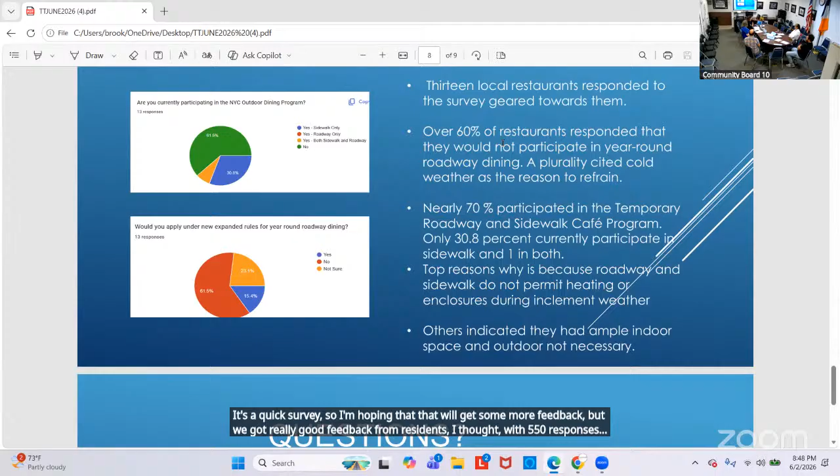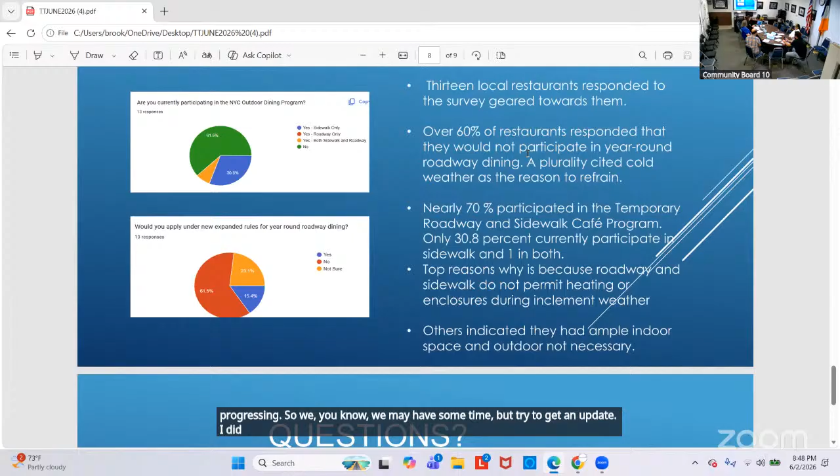We don't have an update yet from DOT and the city council on when that bill is progressing, so we may have some time, but we'll try to get an update. I did ask, and we would want to share our responses with the city council — the residents and businesses we've heard from — so we could at least share their voices and elevate that. I think it may be helpful.

Okay, I know everyone looks anxious. Any questions? So our goal is just to get more feedback now. We're not looking to send anything out yet. I think we have some time, so okay, all right.